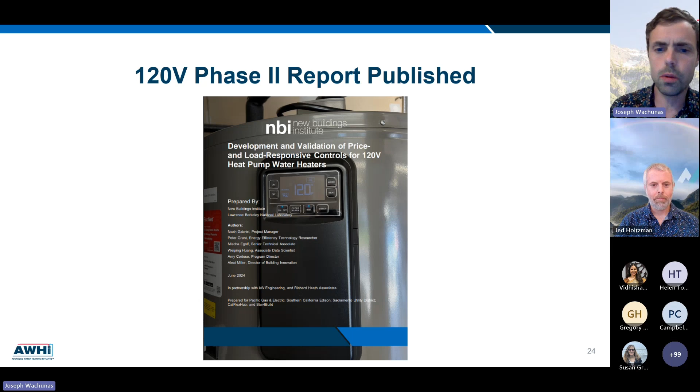Let's pivot to our last theme for today. We wanted to bring on Jed Holtzman from RMI to talk to us about this big lever we're seeing in heat pump water heater market transformation, air quality districts that are phasing out combustion water heaters. So we wanted to get an update. We wanted to share it with our larger group because this is a really important movement that's happening.

So Jed, without further ado, I'll turn it over to you. And if you want to take control of the screen, there should be a button right at the top that allows you to do so. Perfect. Okay, great. Are you seeing everything in a normal fashion? Yes, we are. Okay, perfect. Thanks so much.

Really great to speak to you all. My name is Jed Holtzman. I am on RMI's Carbon-Free Buildings team and really focused on, in the spirit of the Market Transformers branding that AWHI presented for Heat Pump Water Heater Day earlier, a regulatory movement that's developing, the end result of which, in addition to reducing a lot of pollution and health impacts from pollution, is going to sell a lot of heat pump water heaters. So I want to talk to you about that today.

So, not seeing the text. Are you seeing the text on this slide? No. Not yet. Interesting. Does it build, Jed? Nope, there is no animation on any of these slides. Seeing it on the... Let me, here we go. Got it. Okay. These two did have some.

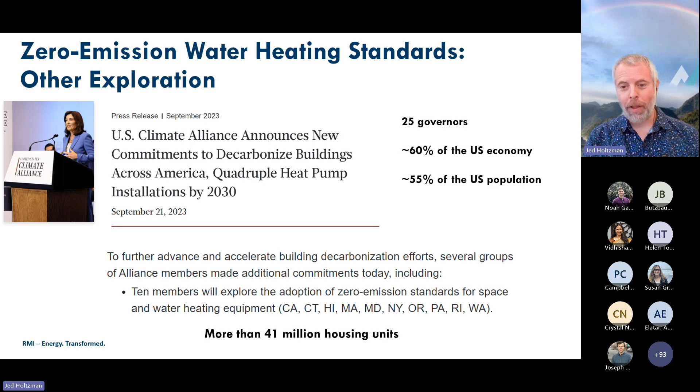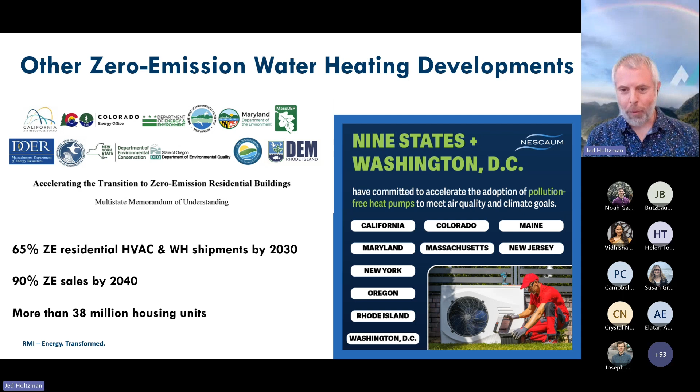And then elsewhere, we are seeing less specifically about standards, but more about heat pump acceleration. A group of 9 states and Washington, D.C. signed an MOU earlier this year under the auspices of the NESCAUM nonprofit to have 65% zero emission water heating sales by 2030 and 90% by 2040. Again, more than 38 million housing units in these states. And so what this all adds up to is a national picture with about 4 states signed up to this MOU to accelerate heat pumps.

4 states signed up to the cohort to examine zero emission standards, and then 6 states which are participating in both, and those are the ones with the hatch marks. And so when you think about the overlap states, these are states where we might look to see whether states are going to plan on using zero emission equipment standards to sort of meet these heat pump acceleration goals or as a tool to meet them. And to that effect, this is more than 1/3 of all the housing units in the country, of course, looking at the states that this is involving.

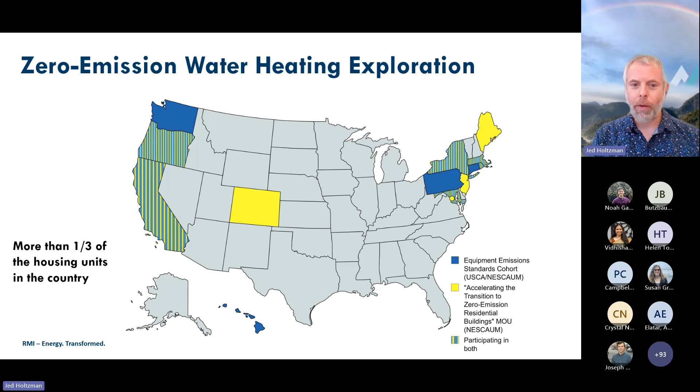To that end, the state of Maryland, which you can see here, does have the hatch marks and is participating in both of these processes. The state of Maryland is moving forward on zero emission standards as well. They are proposing to have a rule on the street by the end of this year and adopted sometime next year. And that is a priority for the governor and something that the Department of the Environment has already started.

So we're not just seeing action in California, but that is what I'm going to primarily talk about today. And so I'm going to really run through a little more detail on the Bay Area AQMD's adopted rule, the South Coast AQMD's adopted and proposed rules, and then if we have time for it, get to what CARB is proposing as well. So first on the Bay Area, what we're looking at here is water heaters between 0 and 2 million BTUs per hour. That's what I'm going to be talking about throughout. As far as the California context, that is sort of what qualifies as residential and commercial, which these standards are residential and commercially focused. And so you can see here 3 different categories.

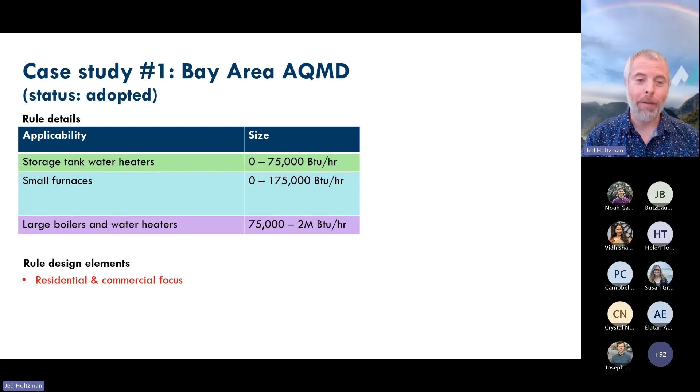Well, we're going to cut out furnaces for the purposes of AWHI. Obviously, these rules are covering space and water heating. But you can see a breakdown between 0 to 75,000, which we're typically calling residential, and then the bigger ones, which we're typically calling commercial. Now, there's a little bit of overlap there. You're seeing lead time between the time that the rule was adopted in 2023 and the actual zero emission compliance dates. A really important design element of these rules is to allow that lead time to set the market signal early and give a lot of time for market actors, OEMs, distributors, retailers, as well as policymakers and consumers to get ready for the transition and do both market development and development of complementary policies that may be necessary in order for the implementation to happen in a smoother way or a more equitable way, whatever the jurisdiction may want to see, which in the Bay Area, of course, they do.

Also seeing staggered implementation dates. So based on feasibility and market availability today and projected market availability, you're seeing, for example, the smaller tank size water heaters with a 2027 compliance date and the larger ones with a 2031 compliance date. What this compliance date effectively means is not that people are coming into the house to rip out the functioning equipment, but that when a newly sold piece of equipment is sold, distributed for sale, installed, etc., that piece of equipment would need to be zero NOx. That is the basis of this regulation.

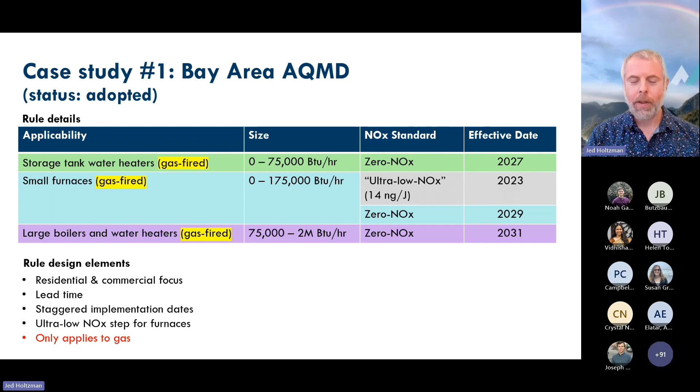And again, this applies to gas units. That is what the original rule that has been dialing NOx emissions down over time to low NOx and ultra low NOx has always covered, and is now turning that dial all the way down to 0. So different in nature, but not in kind to the kind of regulation that's already been going on since at least 1978 in the US.

A couple interesting elements about the Bay Area rule. There's going to be interim market reports on each of these tranches of equipment 2 years before the rules take effect. So for the 2027 water heater deadline that you're seeing, the market report is going to be this December.

In preparation for 2025. And then it will move sort of into furnaces and then into the larger water heaters. There is an implementation working group process that's been set up. We'll talk a little bit more about that. Money for CBOs to participate in the process, consultant reports to fill in knowledge gaps. Talk more about that in a second.

And I think worth noting, the Bay Area rules are leaving mobile home water heaters and pool water heaters at their 2007 emission limits and are not covering those sources.

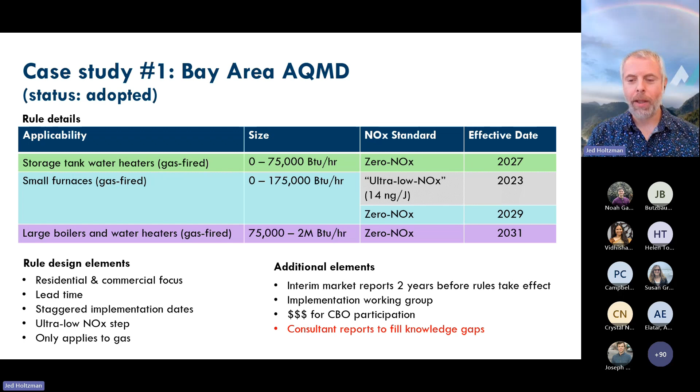Hey, Jed, quick question. Sure. Chris was asking if the gas included propane as well, or is it just natural gas? Thank you so much for that, and apologies that I cannot both see the slides and the chat at the same time. No, this is pipeline gas, methane gas, natural gas, whatever you would like to call it. Propane is not covered by these rules. But very good question, and we'll make sure to highlight that when we get to the CARB piece.

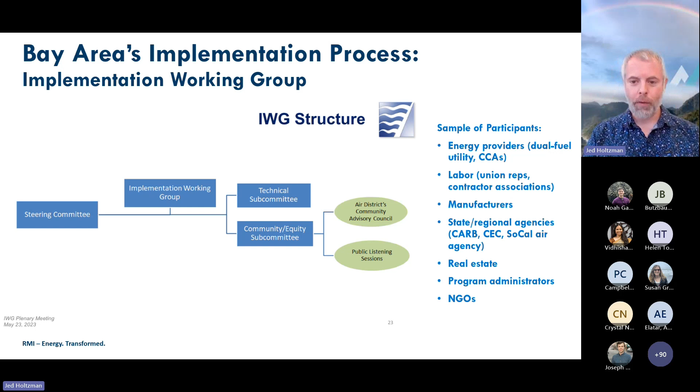This just gives you a quick look at the implementation working group, just to give you an idea of the sorts of folks that are in it. Everyone from local government, a couple OEMs that would participate, NGOs, program administrators, housing developers. It's a fairly broad base of folks. And again, that process for the residential water heater tranche is winding down in preparation for that December checkpoint. And then the process will wind up for furnaces, which is the next tranche of equipment.

Many of those reports are published currently on the Bay Area Air District's Implementation Working Group website. Can definitely forward that to folks if you reach out to me after the presentation. But the rest will be coming later this month, we believe.

So let's just quickly run through the South Coast rules. The South Coast AQMD, worth noting, covers 14 million people's air quality in Southern California. So it would be about the fourth largest state in the country by population if it were a state. Very important jurisdiction with obviously a lot of units in it. A rule was passed in June, and so I'm going to talk about that.

You see here 7 different equipment categories, and so much more regimented and complicated than the Bay Area rules. But you do see the same 0 to 2 million BTU range broken down into different categories. Again, you see lead time. Again, you see staggered implementation dates with 29 through 33 depending.

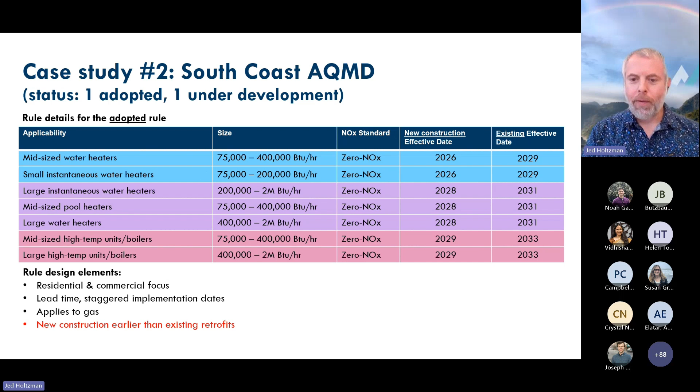Something that is different at the South Coast is that they are having earlier compliance dates for new construction. So again, these rules only apply to newly sold equipment when equipment is replaced upon burnout or for a new project.

And because of feasibility for new construction, cost for new construction, et cetera, they have judged that it is more feasible, and thus the compliance dates for all of those are moved up, with the earliest ones being as early as 2026 for new construction. And there's some alignment there with other state provisions that will be pushing the market in this direction as well.

Another specific provision about the South Coast rules is that for large businesses, so not for homeowners with a tankless water heater, not for small businesses, but for large businesses, there is actually a useful life put on these pieces of equipment as well. Thus, the piece of equipment must be replaced with zero emission upon time of burnout or when this useful life elapses, whichever comes first.

And so this is sort of a backstop rule to prevent endless refurbishment of fossil devices in large businesses, and to ensure that over time, all of these units will eventually cycle over to zero emission. There's also, exemptions is probably not the right word, but a hardship extension process or alternative compliance process to allow for flexibility in cases of sizing, siting, electrical infrastructure, again, all of the challenges that you all are aware of and that may impact installations.

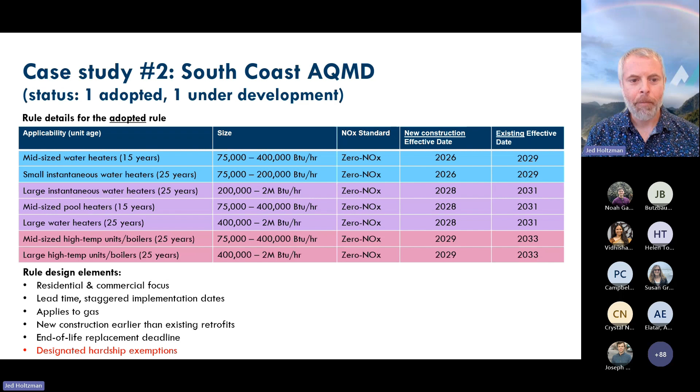And this is also paired with a rebate program, an in-house rebate program, which I will just show you quickly. Really quickly want to talk on, I know we're running low on time. There's also remaining rules that are proposed. So this has already been passed, as was the Bay Area rule I talked about. This rule is proposed. This will cover the residential water heaters that were not covered here.

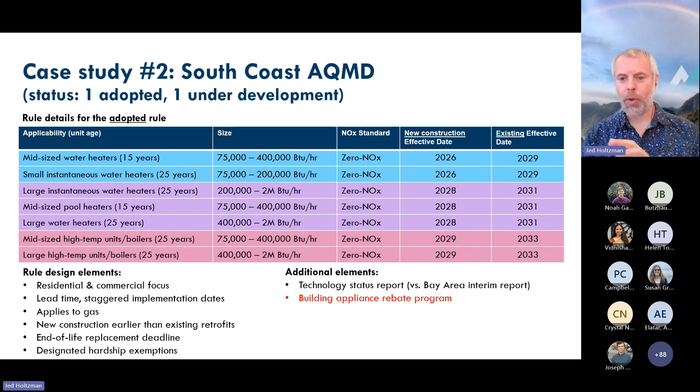So here you're basically seeing tankless, you're seeing higher BTU units, tankless and commercial largely. Here you're looking at the simple residential tank units, and you're seeing earlier compliance dates because, again, increased judgment of feasibility for transition, with the new construction dates, again, taking effect as early as 2026. All the same design elements here. Just want to highlight that this is proposed for adoption this December.

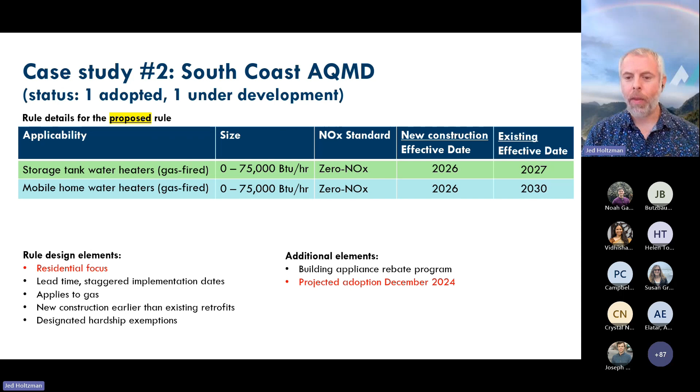I think for the purposes of time, I'm going to have to cover CARB at a later time. It's earlier in the process, a lot more left to do there, so I think there's plenty of time to cover that, but also happy to answer questions that folks have about it at the end.

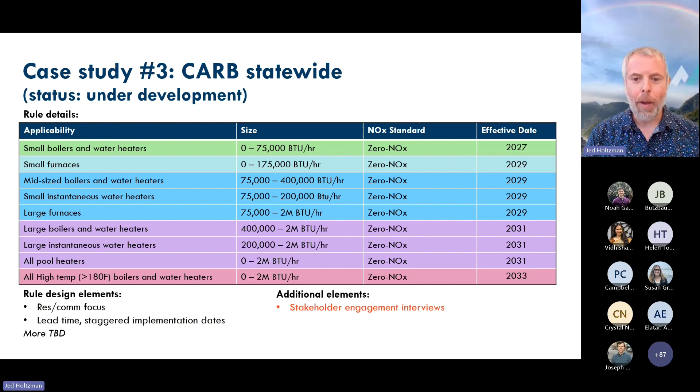And let me just quickly say, I know people might be thinking, well, I thought you couldn't have things that just applied to gas because of the Berkeley decision and the new interpretation of EPCA. I just wanted to highlight, you all are probably aware, but these regulations are emissions-based, source-specific regulations to reduce criteria pollutant emissions to achieve national ambient air quality standards under the Clean Air Act. And so it's an entirely different bucket of law than the code and EPCA conversation that we've all been having, and firmly protected in that regard.

Also, these rules are fuel neutral. So if, for example, zero-NOx methane combustion units were invented, those would be covered. Those would be compliant with this rule.